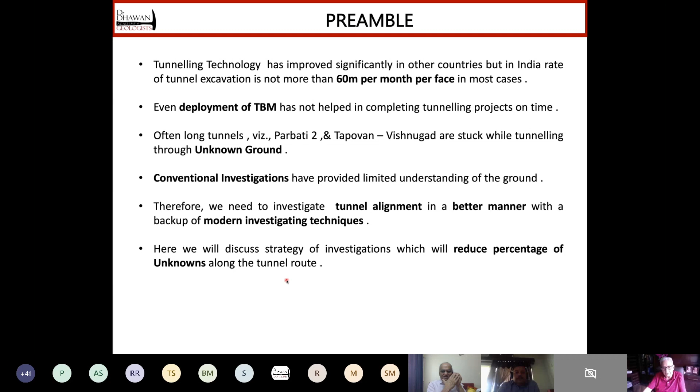You take any tunnel, you will find three prominent categories after you complete your geological investigations. Few reaches of tunnels will be well known to you. You would know what type of rocks are expected, what would be the jointing pattern in these stretches, and how they are going to behave. So these are the known areas, and we call them known knowns. These can be dealt with by good design and proper planning of excavation.

In the second category, in some reaches of tunnel, you would know the problem. The problem is known to you, but where it is going to occur is not known to you. These should be mitigated by appropriate contractual architecture.

But the third category is dangerous, where you neither know what would be the problem, nor do you know where it will occur. And these are the most dangerous situations, and Parbati was under one such situation where water with very high ingress with a lot of silt appeared suddenly, and the TBM got submerged.

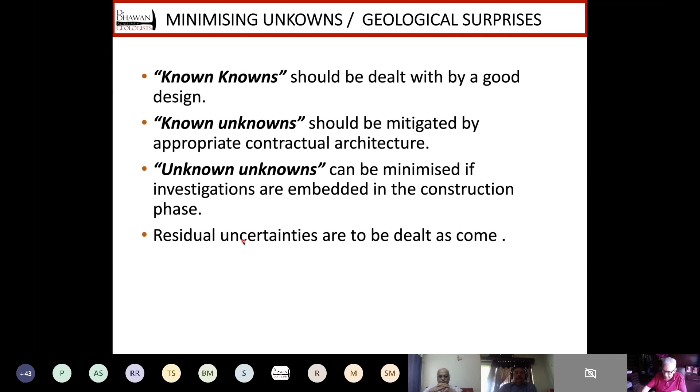You will see the area is totally inaccessible. There is complex geology, which is very common to all parts of the Himalayas. You can hardly see any rock outcrop. You cannot do deep investigative drillings because of poor accessibility. How will you take truck-mounted rigs? So there are problems and problems. So how to resolve them?

And you should really understand how scanty is the data based on which we try to prepare a geological section, and then we do rock mass classification, and from there we plan the entire excavation and support design of a tunnel. So therefore I say, how little we know. So you can yourself understand, from 2 to 3% of rock outcrop, you are going to make 100% prediction of the geology along the tunnel alignment.

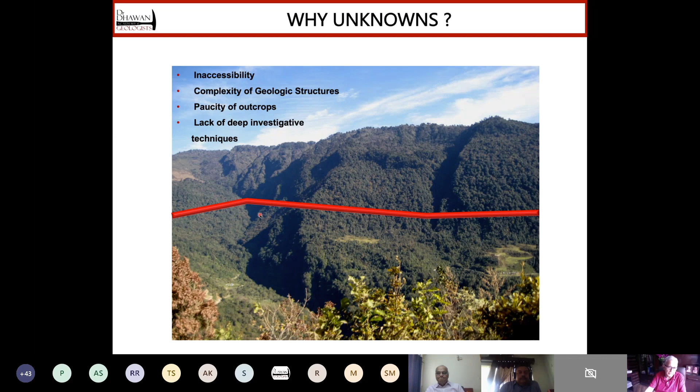So even if my geological understanding through whatever mapping I have done is correct, I can estimate the type of rock which is going to be intercepted. Suppose my pointer indicates the tunnel alignment; you can estimate the type of geology, the type of rock along the proposed tunnel alignment. But within a particular rock, it is highly unlikely that it will be uniform throughout. There will be changes in the jointing pattern, joint spacing, nature of joints, then holistically the structure will change.

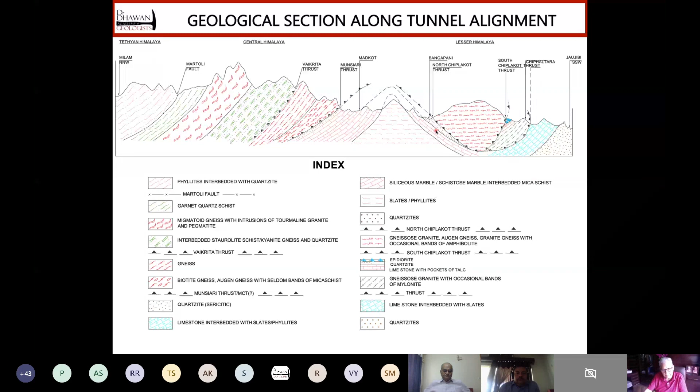Suppose this band of limestone on this limb of the fold would be different than on the other limb of the fold. So geostructurally, these are different. So it is not appropriate to judge the behavior of a rock mass purely based on our geological assessment. We must bring the concept of the geostructural unit into it.

Now, after doing our geological mapping and making the section, we conventionally make an attempt to understand the rock mass with the help of some rock mass classification. For example, here in this case, it is RMR. You will see prominently there are two kinds of rocks, and for each sector, the geologist has done rock mass classification. So based on the outcrops which he has measured on the surface, which are very few in number, we are trying to predict the behavior of the rock mass in the entire reach, and we are trying to assess the rock mass classes in percentages through these pie diagrams for all three sectors.

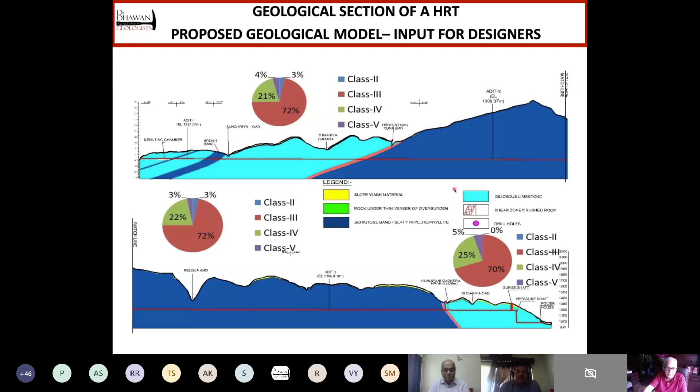So you can yourself imagine, when you construct the tunnel, excavate the tunnel, it will be a surprise if this kind of classification totally comes true.

Based on my experience, I divide the expected rock masses along a tunnel alignment into three categories equally. I mean, it is my own assessment that about 1/3 of the area falls into the known knowns, 1/3 in known unknowns, and the balance, unknown unknowns, is also 1/3.

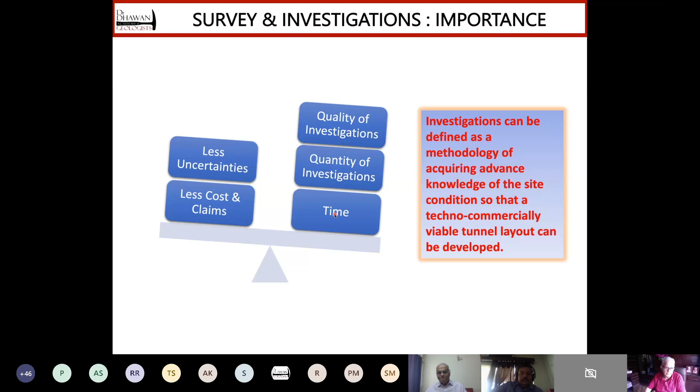And with this background, we can certainly say, and it's common sense, that if we do good quality investigations, we do adequate investigations, invest proper time and money on this, we will face less uncertainties and less cost and claims. So why investigations? Or I should say, why do we need a strategy for investigations? To develop a geological model, a dependable geological model. I showed you a section. That section, before we start making our DPR, should be very well frozen. And this will happen only after you develop a dependable geological model.

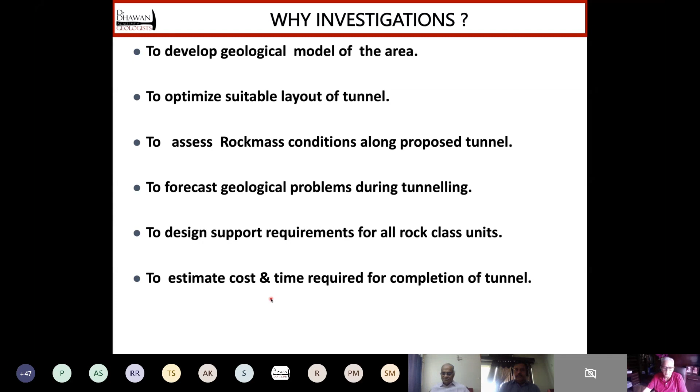If you have a good model, you can optimize the layout of the tunnel. And your assessment of rock mass conditions along the proposed tunnel will also be dependable to a certain extent. And our basic aim to do investigation is to forecast geological problems during tunneling. And finally, to design the support requirement for all rock class units which are expected. Once we do this, we will be in a position to prepare a dependable cost estimate and time required for completion of the tunnel. Not only that, we will be in a position to choose the right kind of technology for tunnel construction.

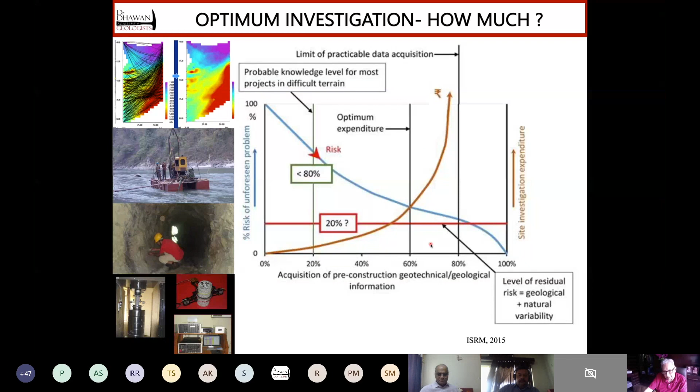The brown line here, once again on the y-axis, we have plotted the expenditure. So you will see with more acquisition of data, with more efforts, more money is required. Finally, these two curves intersect at this point, which is around 60%. And beyond this, you will find that the brown curve becomes steep initially and then almost vertical. So it means you can't cross beyond 80%. Whatever you may do, 20% residual uncertainties will always be there. So that is the level of confidence on investigations. And therefore, initially you have to do a good investigation and then plan a contract in a manner so that you can intervene in between and there could be some mid-course correction. We'll talk about that.

In my opinion, in the Indian context, it is just lip sympathy, and we do some drilling only in low cover reaches, nala crossings, or maybe where we anticipate a major geological problem. I have not seen any deep drilling for any tunneling project as yet. We do good drilling for dams and powerhouses, but not for tunnels. And then we apply some amount of geophysical investigation, we'll talk about it, and rock mechanics testing.

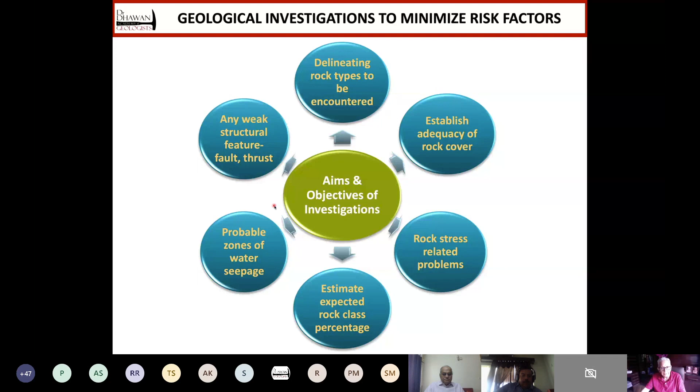The basic aim is to delineate the rock types, to establish adequate rock cover along the alignment, to estimate the rock stress, estimate expected rock classes along the tunnel alignment, probable zones of water seepage, and any other structural feature. So this is our aim. This had been our aim, and this will be our aim in future too. The only difference is some more seriousness, or a systematic approach by integrating advanced techniques of investigation. What are these advanced techniques of investigation? LiDAR-based mapping. It is a quicker method, and particularly wherever the area is totally inaccessible, it is helpful.

Airborne geophysical surveys. These days, all NHAI contracts are asking for EM surveys, airborne geophysical surveys. We have yet to see results, but I'm very hopeful that this is a very, very important step for improving quality of investigations. Then the drilling, directional drilling, which can investigate the medium below the Nala beds, below the river crossings, in any kind of tough geological condition.

And one of the best examples which I know is the Gotthard tunnel in Switzerland, where a marl band, which was very thick, was investigated with help of about 1.5 kilometer long drill hole. And then during construction, tunnel seismic prediction system is very useful. In NHPC, where I initially served, we had been using it at several projects.

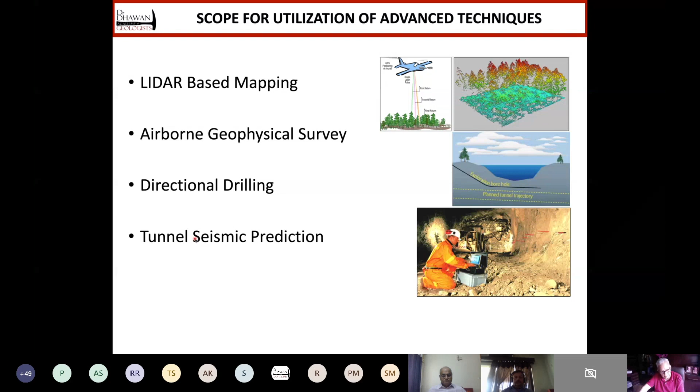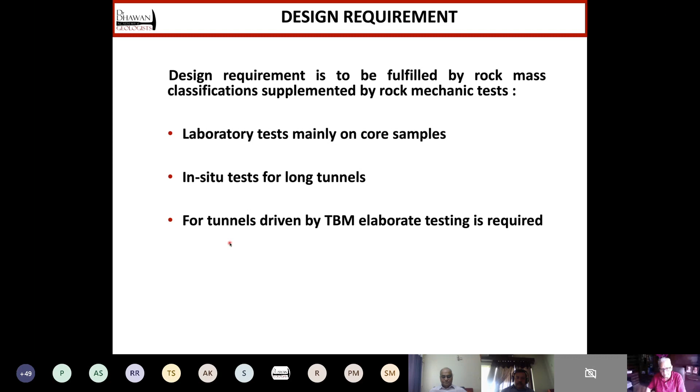To cater to the design requirement, we will have to do extensive laboratory tests, mainly on core samples, which we will either collect during the geological mapping or from the drill holes. In situ tests for stress measurements along the long tunnels. And then if the tunnel is to be driven by TBM, elaborate rock mechanics testing is required.

While focusing on other investigating techniques, we should not forget RMR and Q system. There are so many others, but the Indian geologists are somehow more convinced with these two classification systems. These are very important tools, particularly during the investigations. And this is one tool which remains useful to you from the preliminary stage of geological mapping to the advanced stage of geological mapping, tunnel stage, support design stage, and also during the construction.

Originally, these methods were designed for estimating tunnel supports, and later they were extended for assessing the rock mass properties as well. Nowadays, there are several empirical equations which help you understand rock mass properties: if you know RMR or Q, you can assess C, phi, modulus, and other properties of rock mass. And both the classification systems provide a realistic estimate for numerical modeling purposes.

But my suggestion is that we should keep a check. We should try to correlate the values we get from RMR, Q or Geological Strength Index, GSI, which is established by Hoek, with the actual rock mechanics testing program, so that our estimates do not go haywire. So some amount of testing is required during the DPR stage, so that we can use those figures for our designs.

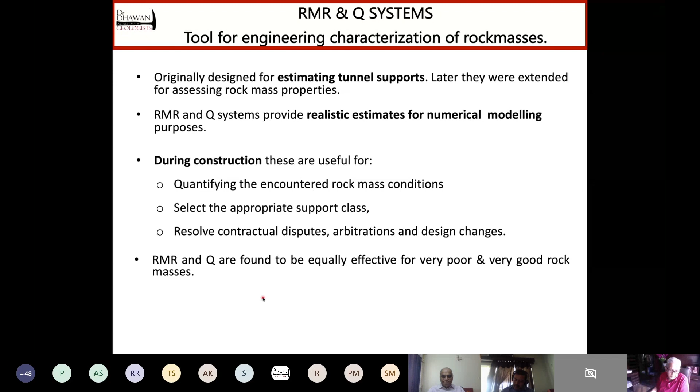And both the methods are useful even during construction of the tunnels for quantifying the encountered rock mass conditions, selecting the appropriate support classes, resolving contractual disputes, arbitration, and design changes. Many times people ask which one is better, RMR or Q? I think this question was asked to Barton and Bieniawski both. So both have written a paper in 2008 wherein they have stated that RMR and Q are found to be equally effective for very poor and very good rock masses. So for the entire range of rock mass, these are useful.

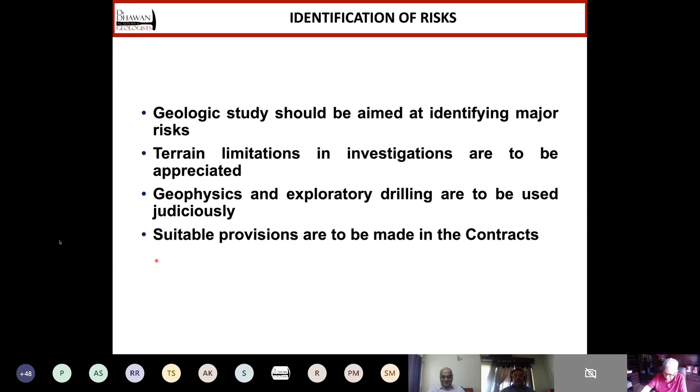So now the risk identification and management. Geological study should be aimed at identifying major risks, but at the same time, terrain limitations in investigations are to be appreciated. Geophysics and exploratory drilling are to be used judiciously, and suitable provisions are to be made in the contract. These are the four, you can say, mantras for risk identification. And we must do it before we start construction. We should identify geological and hydrological risks. And these two things are to be done only with a backup of good geological data, which emerges from good geological mapping.

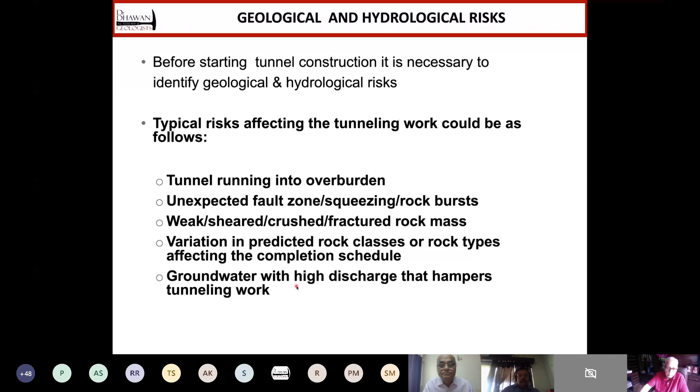And the typical risks which I have seen in most tunnels are tunnels running into the overburden, unexpected fault zones, squeezing rock zones or rock bursts, weak, sheared, crushed, fractured rock masses, variation in predicted rock classes or rock types affecting the completion schedule, and groundwater with high discharge that hampers tunneling work. And particularly, it is the enemy of those tunnels where TBMs are deployed.

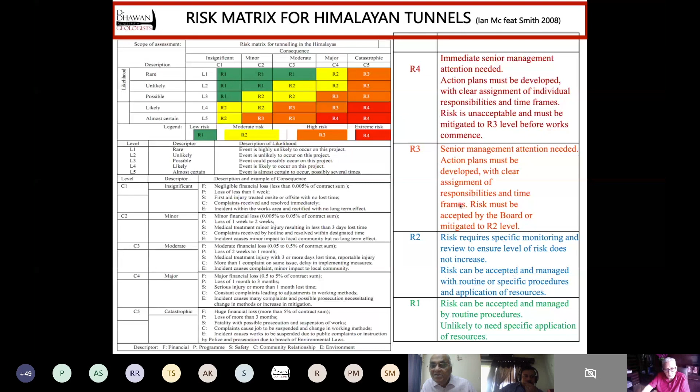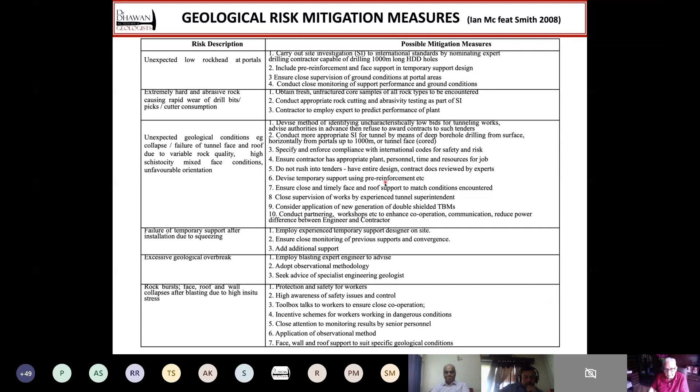After identifying from R1 to R4, he has given an action plan for R1, R2, R3, and R4 separately. Because of time constraints, it will be difficult for me to discuss each risk category, but certainly those who are interested will find this in literature. And then he has given the risk mitigation measures also. He has classified various kinds of risks and given possible mitigation measures, which are very elaborate and self-explanatory. You can read his paper and find this. Now, what should be our strategy?

As I showed you the picture of a project in Bhutan, luckily I was heading the team in 2010 who initially visited this. And that reconnaissance visit in the early stage was very, very much useful to us. Reconnaissance visit in early stages, because with an experienced team, you can rule out certain nuisance areas just while you are walking through the terrain.

In case of hydropower project, you can eliminate more than half of the problems based on your regional geological setup if it is known to you during reconnaissance. So it helps to avoid problematic areas. You must carry topo sheet and backup of remote sensing studies at that time.

Regional geological maps: luckily, once again, in Indian context, GSI has prepared geological maps for almost all areas, maybe up to 98% of areas geologically covered. And we have geological maps either on 1:50,000 scale or 25,000 scale. So these are very useful to us.

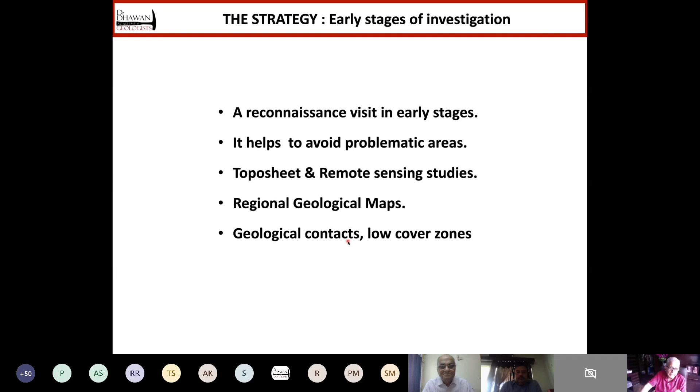And if we have a peep into the literature, which is made available to us by universities, by researchers, we can estimate the geological contacts and geology, the reasons why the low cover zones in a particular area have developed. So this is strategy number 1, prior to starting investigation.

And after that, we must plan airborne EM surveys, or in low cover reaches, we can use seismic refraction and resistivity profiling and imaging, because drilling was not possible at all the places in every project. To me, this has really been very useful in estimating the geological situations in the low cover reaches.

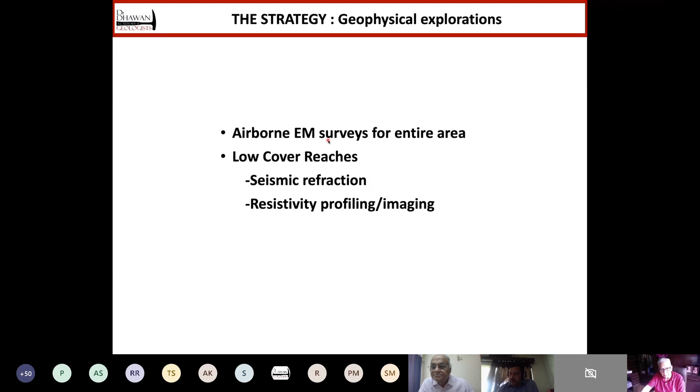I'm not aware what are the results of EM surveys which are being done nowadays for several tunnels which are being planned by NHAI. So this much understanding requires to be developed even before we start investigation during the feasibility stage.

In feasibility stage, we should do engineering geological mapping, that is EGM, on minimum 1:5000 scale. Integrate this EGM with geology, geophysical results, remote sensing data, and whatever is there at your command. Overall geological model is developed in this stage, and rock mass types as expected in tunnel are identified. Geological contacts are established, rather reaffirmed.

Whatever you had estimated based on your regional geological understanding is to be firmed up. And then a lot of rock mechanic testing and petrology of various rock units is to be done. And if required, some short holes should also be done.

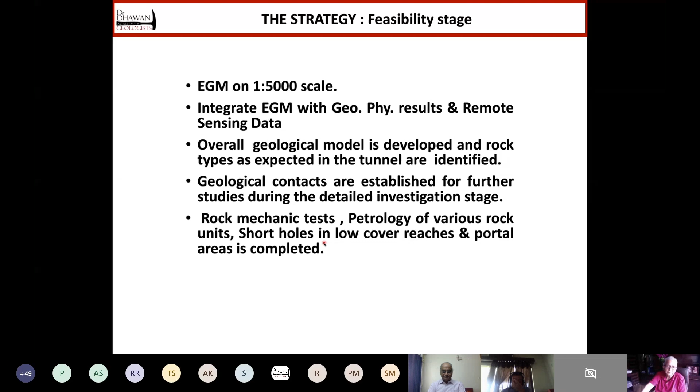And during the detailed geological investigations, we need to do geological geotechnical mapping and reinterpretation in light of fresh data, integrating results of exploratory drilling and rock mechanic testing. This is the stage when you should plan whether you should have a deep drill hole or a directional drill hole or not. And this is the stage when geotechnical assessment of rock mass classification is developed for each geostructural unit.

Rock mass classification for known conditions greatly helps in estimation of rock supports or the treatment required in those areas. Risk assessment is done with special attention to major lineaments, fracture zones, shear zones, nulla crossings, and unexpected geohydrological conditions. Then poor rock mass zones should be confirmed by deep drilling or directional drilling, as I have just said.

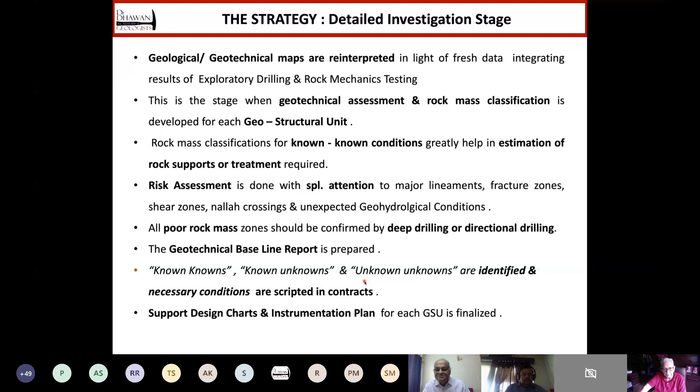And finally, all this data is to be synthesized in a geotechnical baseline report, and this should be separated from your DPR concepts. At this stage, you would know how much we know along the tunnel, how many known unknowns are there, and how much area is still unknown to us. These will be identified. And if you have that, then support design charts and instrumentation plan for each geostructural unit can be finalized. To synthesize everything, I will just take a minute. I think I'm running into my last minute now.

This is a flow chart which I developed during my PhD, which was on the rock mass quality parameters and tunnel supports for Himalayan tunnels, where in the central column you will see that whatever geological mapping, data acquisition, rock mechanic testing, remote sensing, geophysics, and whatever techniques you have applied, this is the source. This becomes the source of analysis for everything.

In short, the central column takes you to support design by empirical methods, that is rock mass classification. On the left-hand side, you take out the discontinuity data and apply your software of DIPS and UNWEDGE and get an idea about the structurally unstable zones.

And on the right-hand side, from general parameters such as rock strength, and knowing how much is the rock cover, you will come to know whether there is any chance of stress failure or not. And if you integrate all this, you will optimize your tunnel support requirements.

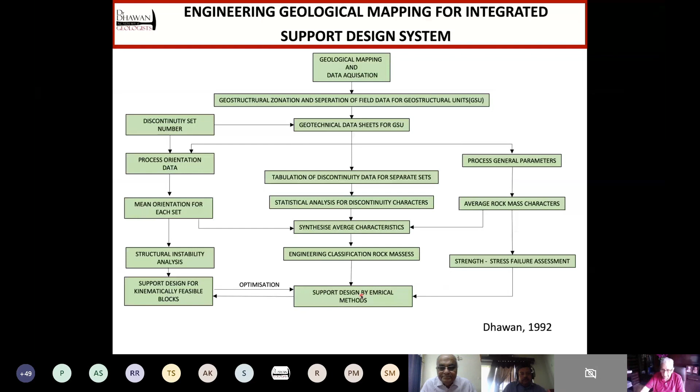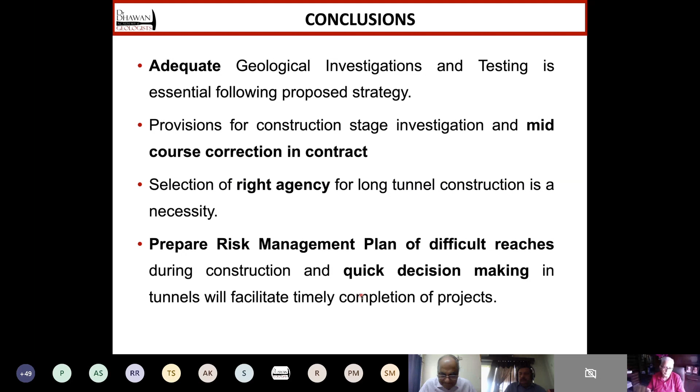And with this, I would conclude in few words: do adequate investigations, keep ways for mid-course correction, select the right agency, and prepare for the worst kind of risk and prepare a good risk management plan for difficult reaches. Thank you very much.

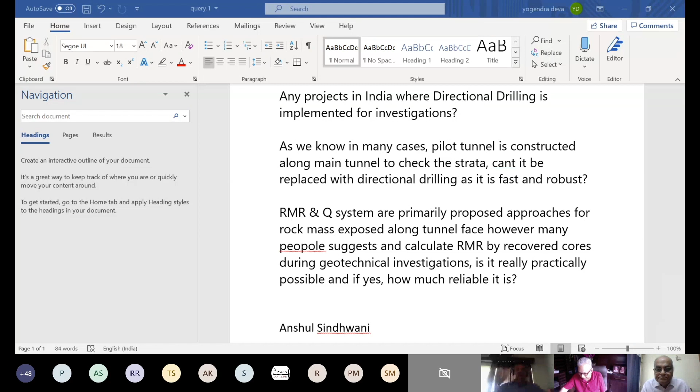But there will be some areas where you will apprehend that in the limestone rock mass, I have some shear zones. I really do not know what are the proper RDs where these thick shear zones are going to intersect, or to add insult to injury, whether there will be some amount of groundwater appearing through these shear zones. So the right stage is the detailed investigation stage where it should be unearthed.

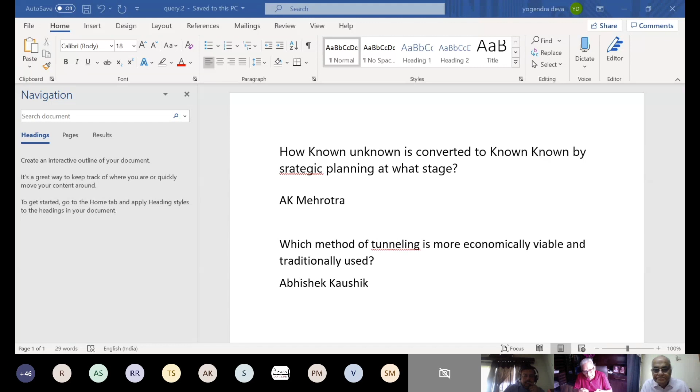And if you can investigate these areas by some medium depth drill holes, targeting those weak zones, that will also help you to convert the unknowns to knowns. So your question is how known unknown is to be converted to known. So this unknown, once we know the location, then known unknown is converted into known.

I hope, Mr. Mehrotra, I have given you the answer. I do not know whether you are satisfied or not. Abhishek Kaushik is asking, which method of tunneling is more economically viable? Yes, sir, I am satisfied, sir. Satisfied, thank you very much. Thank you.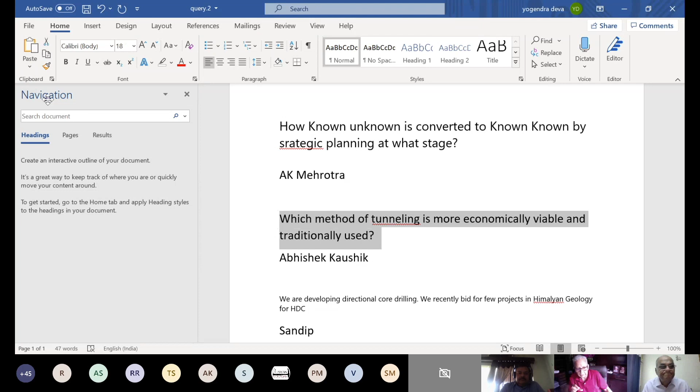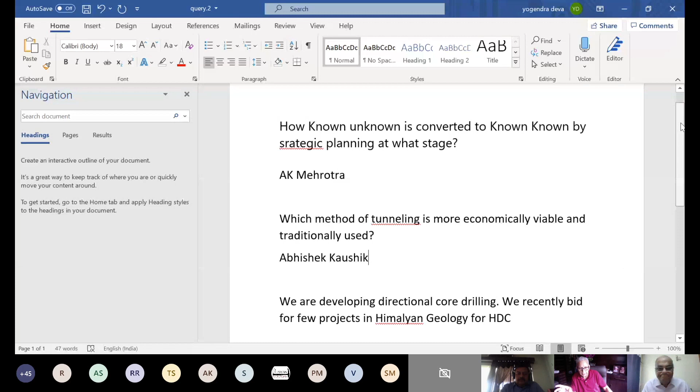Which method of tunneling is more economically viable and traditionally used? I think, Abhishek, you wish to ask whether the drilling and blasting method or TBM method. These are the two main types which we normally use. And within DBM, whether we are using NATM method or something in between. So in my opinion, both the methods are good.

TBM basically in Himalayas has been applied if we can't find extra entries into the tunnel, if we can't find additional adits, because our thumb rule is to limit tunneling per face by conventional methods of DBM to about 2.5 kilometers per face. If it is more than that and we can't find intermediate access, then we go for TBM. But it has to be decided in conjunction with geology and so many other things.

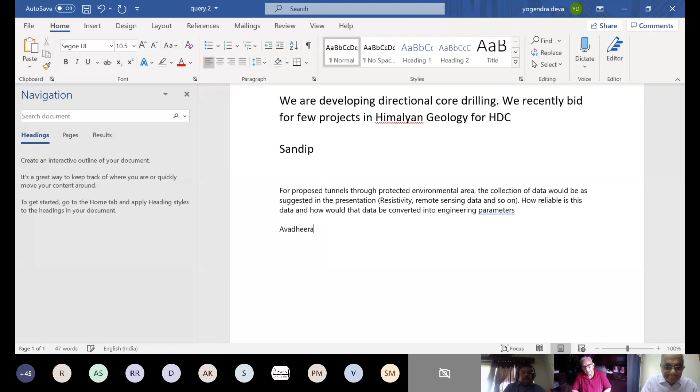I mean, I don't have a ready-made answer in support of any of the methods. All methods are good, but the only thing is how seriously you adopt a method and how seriously you do your work, that is more important.

We are developing directional core drilling. We recently bid for a few projects in Himalayan geology. Sandip, HDC. Sandip, I would be very much interested to speak to you. Maybe after our webinar, please get in touch with me. My email and telephone number will be displayed. Sure. Thanks. Okay. Thank you. Okay, thank you.

For proposed tunnels through protected environmental areas, the collection of data would be as suggested in the presentation, resistivity, remote sensing, and so on. How reliable is this data, and how would that data be converted into engineering parameters? A tough question, because you have said environmentally protected areas. First of all, as far as I know, in such areas, total entry is banned.

So you can have a broad geological model based on regional geological mapping or some remote sensing studies, and some airborne geophysics can also be done. But for assessment of the rock mass characters which are required for RMR and Q, I mean rock strength, joint spacing, aperture, and so on, you have to have some sample outcrops.

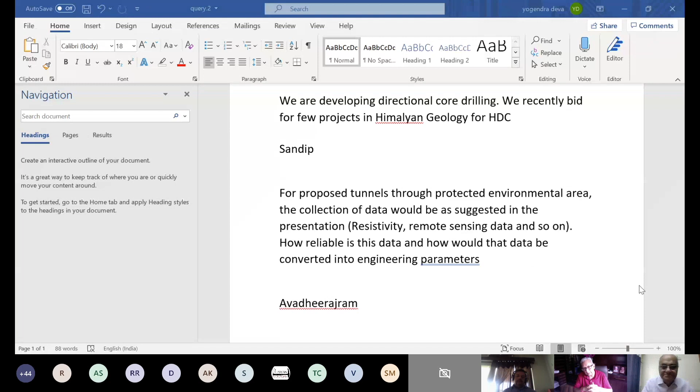And as far as I understand, normally you will not get permission for doing any project in India in such areas. But in case you get it, first of all, you will have to apply for doing investigation in such areas. With my background of mineral exploration, which I did for about 5 years as CMD of Mineral Exploration Corporation, MECL, we used to take a special approval for doing investigation in environmentally protected or reserve forest areas. If you are lucky, then you can proceed further.

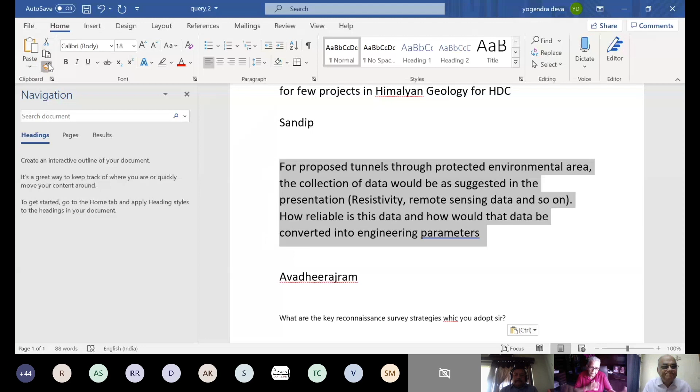Otherwise, there is no indirect method to convert all this information into engineering parameters. Some conversion can be done, but not very reliably.

So this is the answer to you, Mr. Avadheerajram. And the next question is, Mr. Deva, if I may interrupt, this is the last query, and you have got 2 minutes to finish this. Thank you very much. Okay, sir. Okay, I'm very lucky in that case.

So this is once again from Mr. Kaushik. What are the key reconnaissance survey strategies which you will adopt, sir?

So reconnaissance, of course, if I say the stages of reconnaissance: take Survey of India topo sheets, go to the Google Maps, which are readily available, take good imageries before you go to site, but nothing can replace the actual traversing of the ground. So this is the prescription for you, Kaushik. So with this, I think I have answered this question.